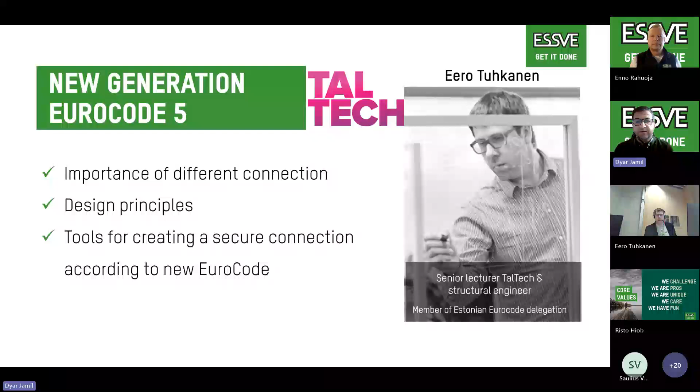For those who are new here, I'm Eero Tuhkanen from Tallinn University of Technology, and we have this nice academy together with ESSVE, where I present some small parts from the new coming Eurocode 5. We do that in a very short way, so one presentation is only 10 minutes, to not overwhelm you but to give some idea what is coming. Today's presentation is the follow-up of the previous one. It's about axially loaded fasteners. Last time we spoke about pull-out strength, but today's topic is design axial compressive resistance.

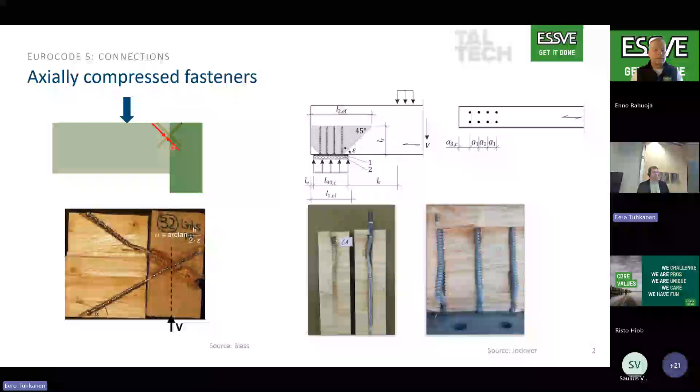Axially compressed fasteners or screws are mainly used in two situations. One is here on the left side, where the secondary beam is connected to the main beam, and if we do this well-known cross connection with the crossed screws, that means one screw is compressed in this situation. And here is one picture from the test series made by Professor Blass, where we can see this compressed screw buckled in the timber.

The second well-known usage of the screw is as a reinforcement, where, let's say, under the support we have not enough strength perpendicular to the grain, so we can reinforce the area to increase the support area, and here the screws are also compressed, and buckling is also possible in this situation. This buckling occurs in the area about 5 to 10 centimeters from the load application point, so very close to this connection area.

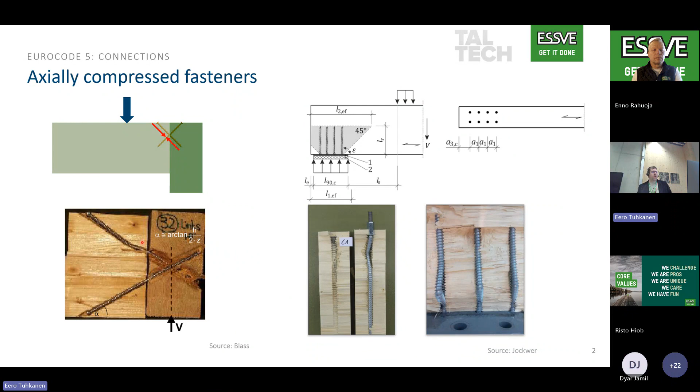This calculation method is already used in European technical approvals, so-called ETAs, but now it is also presented in Eurocode. In Eurocode, the model we have to check is that we have to find the minimum value from the timber part and from the steel part. The timber part, which we spoke about last time, is the characteristic withdrawal resistance. It's the same as when we pull out the screw. It doesn't matter if you push it in or pull it out. The calculation is the same as we saw last time. And of course, the design value is covered with the partial safety factor and the k modification factor.

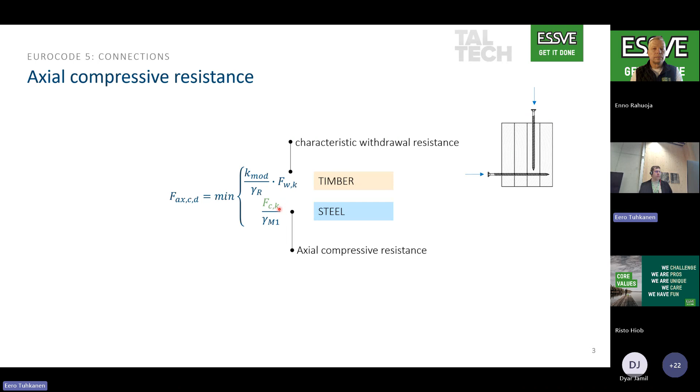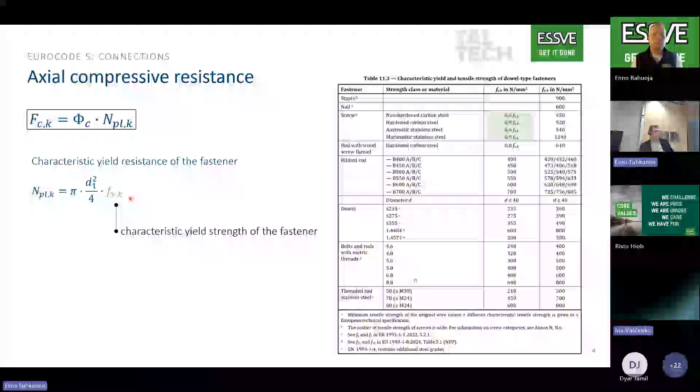But for compressed fasteners, we also have to check the steel part, which is the axial compressive resistance. The axial compressive resistance is covered with the partial safety factor for steel. Today's topic is this Fc,k, the characteristic value for compressive resistance. Compressive resistance is actually the characteristic yield resistance of the fastener, which depends on the geometry of the fastener and also the characteristic yield strength of the fastener. This is a material parameter, and in the new Eurocode you can find these material parameters in the table, so you don't have to go out to find that.

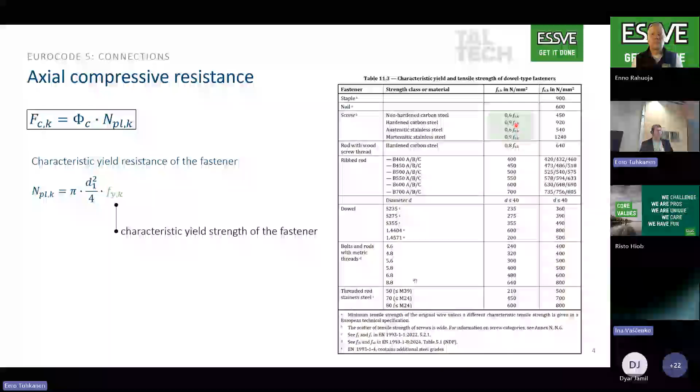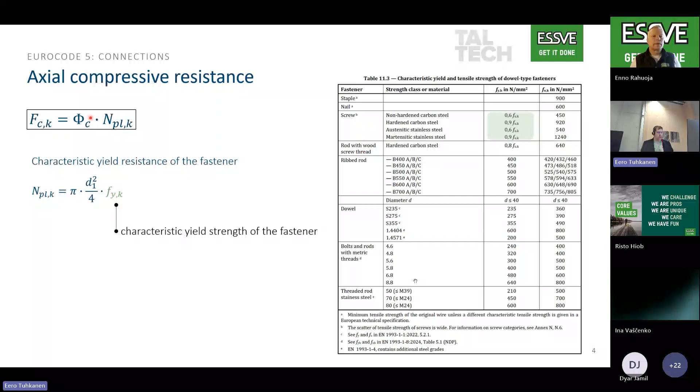But the only thing is that the buckling in this fastener or screw is not free. It means that it's supported by the timber around the screw, and this is considered with the characteristic foundation modulus of the fastener, CH, which depends on the characteristic density of the timber. So this buckling is prevented by timber, and then we have to check how much density we have to find this buckling factor.

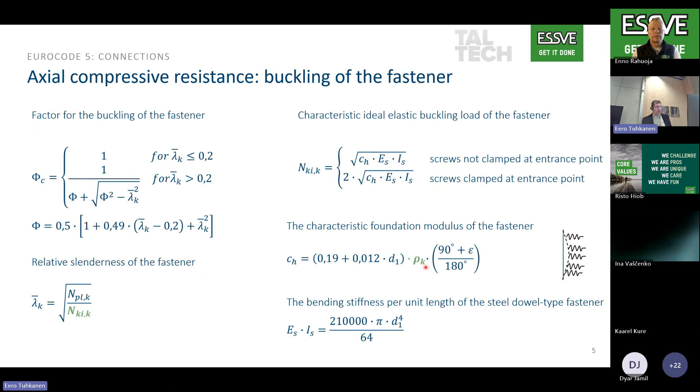The beneficial scenario for this: the pull-out resistance we talked about last time, and the compressive resistance, the topic today. One very good example where to use these screws is the so-called tapered beam, where we have a glulam beam with an inclined top part. In this kind of beam we usually have problems in the middle zone, where we have tensile forces perpendicular to the grain, and we can reinforce that with the screws.

So here we can calculate the pull-out strength of the screw. Also, usually the problematic thing is the embedment or the compression perpendicular to the grain in the support area, and here we can use the screws as a reinforcement for this area.

But coming back to last week's presentation, where we talked about the pull-out strength of the screw, or push-in strength of the screw, it was depending on the factor K mat, which is a material factor that considers the different layers in the structure. We can use the benefit in such structures: depending on the amount of layers the screw is penetrating, we can increase this value for pull-out strength or push-in strength. So this was the topic today.

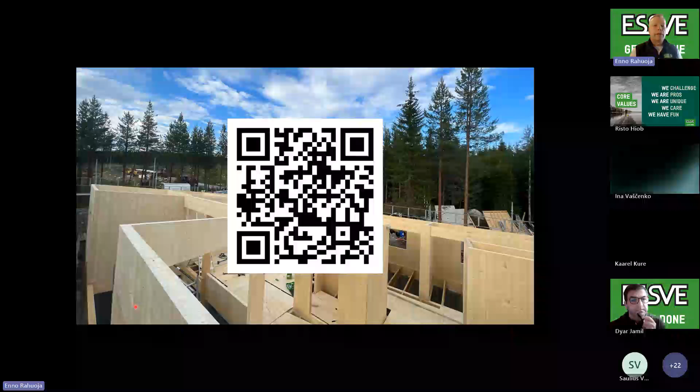My part today is to introduce ESSVE as the ESSVE timber calculation program. I'm a technical sales engineer in the ESSVE group team, and I have over 25 years of experience with fasteners in the Baltic states. Today we have two applications in our calculation model: one is axial, another one is lateral. Today's subject of our calculation is axial calculation.

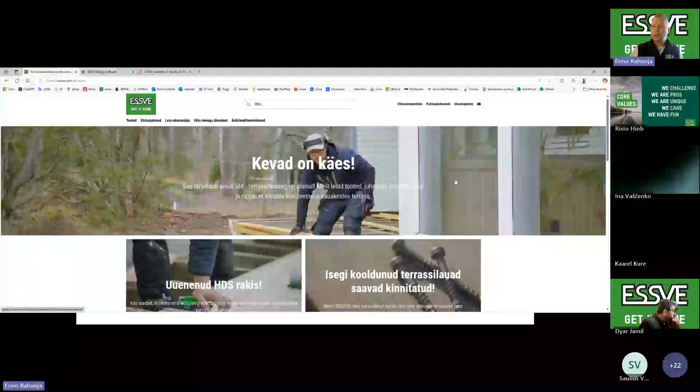If you go to our local country website, either Latvia, Lithuania or Estonia, you can easily switch the language here. The view is similar. If you go here under timber, today I show the Estonian site, you will find wood, and another one is concrete. Roll it down and you will find the ESSVE software. A little bit lower you will find the catalog for the timber tech product range. And here is the area where you can also register over our website and see the history of our presentations.

If you log in for the first time, I recommend you sign up with all your initials. Then those will stay on the footer of your calculation report, and in the future your contact info will be included when you deliver it to your customer, well presented on that report.

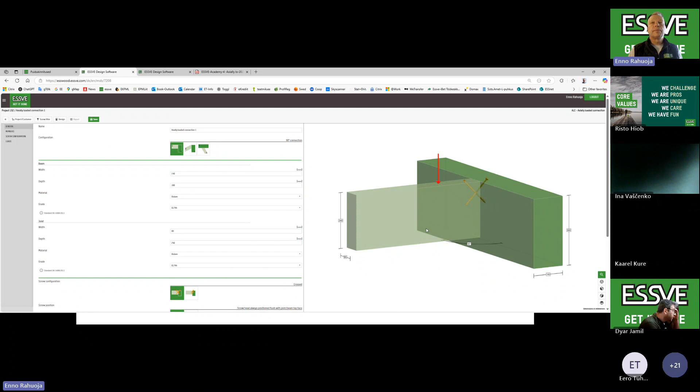Today, the focus was axial connection. So I take it from the right side, the application. And if I'm looking at the application side here, then today we're looking at a 90-degree connection. And let's say at the beginning I don't change any parameters, but you could change here the type of timber, and the type of timber also here in the subconstruction area.

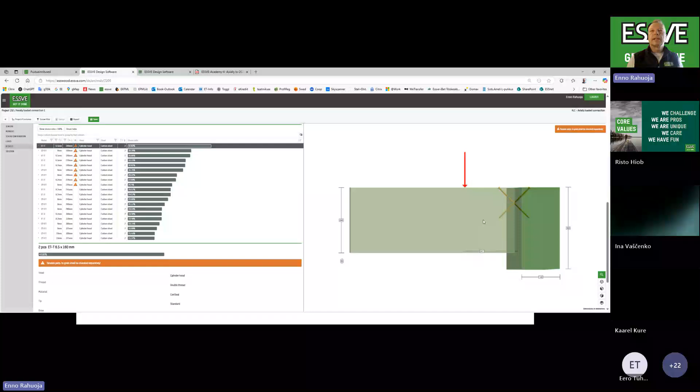But what I wanted to bring up here in the first stage is that when we go directly to the design, then often you will get the exclamation mark. And the exclamation mark will say that you need to check separately the tension perpendicular area, which means that the wood could split here. So it's a little bit connected to Eero's presentation today, what he showed, that for glulam you need to find out the strength of the different layers, so to get the timber strengthened.

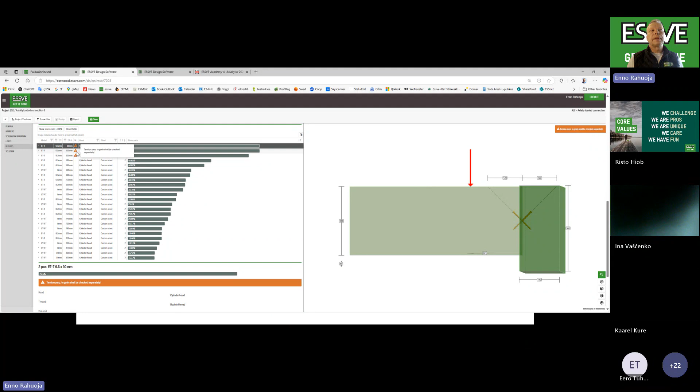The easiest way in this case to get rid of those exclamation marks is when we go back and we move the location of the connection. So we bring it a little bit lower. So when I now go into the design area, then we see that there are only 2-3 applications left with just short fasteners. When we go for a longer fastener, let's say here, then that will disappear.

And for example, when we look at this connection at the moment, then you could look also at the cross section, that 47% maybe is not satisfying me on security level. You could also use another option with the same length of fastener, where you're going to have double the amount of fasteners, because the width of the support beam is able to take 4 fasteners across the wood level.

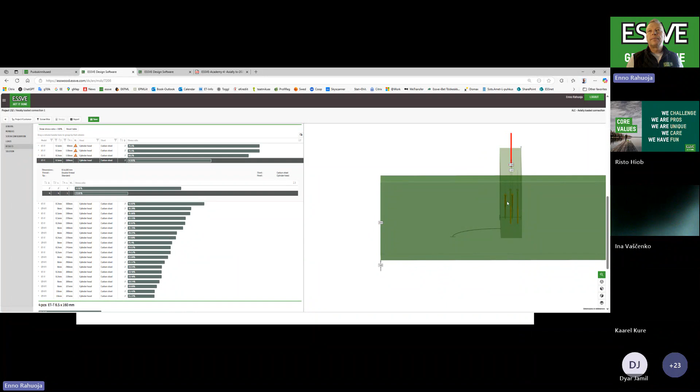Now, as today's subject is to talk about thin wood, which is very popular in our Eastern Europe region, this connection part here could be 45 millimeters. Then we go back and look here, where is the dimension area? And let's say the dimension area here, we will change it to 45. You see that turns red here. So we change it to 45. We can have maybe 250. And we'd like to have ordinary timber, so we can choose that as well. Let's say the timber is C24, not C16.

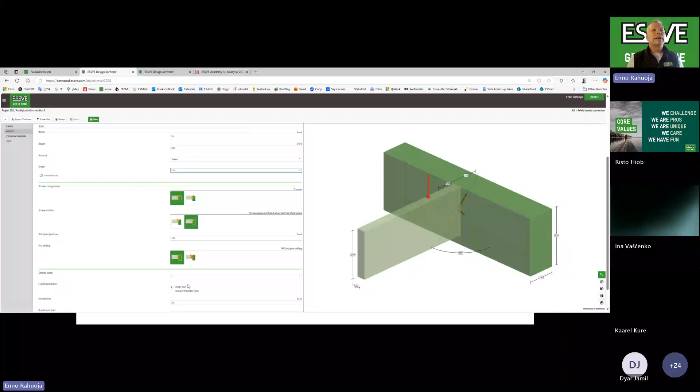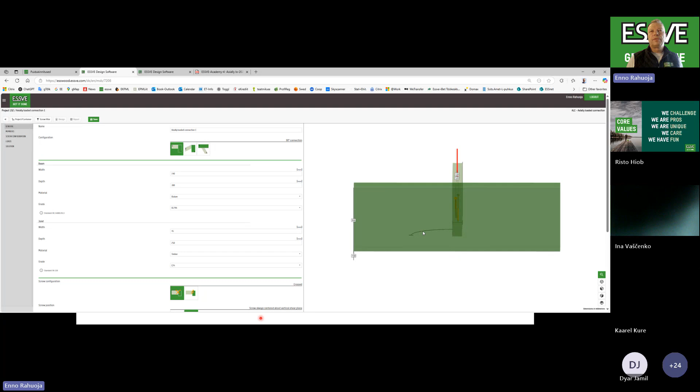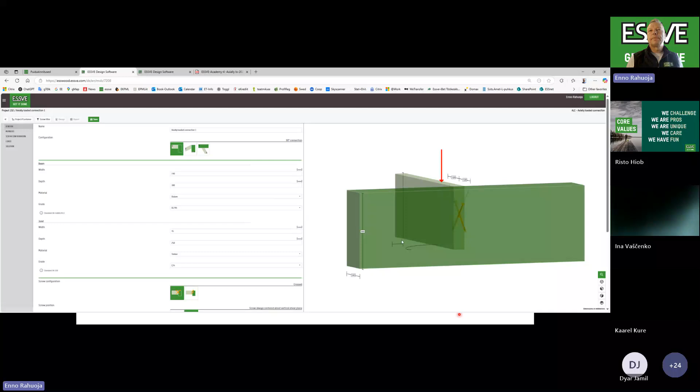And now when we go to the calculation, I don't change any other parameters at the moment, but I put it in design, and we find out that there are no solutions. So we are not able to do the calculation because the wood is so thin. As we know, there are some edge distances, so we are not able with such thin wood to make this cross connection. So in the first steps, I recommend changing either the lineup of the fasteners or making a pre-drilling. So you're able to test pre-drilling as well: does a pre-drilled hole give us better edge distances? But as we see, pre-drilling doesn't give us an opportunity to do that either.

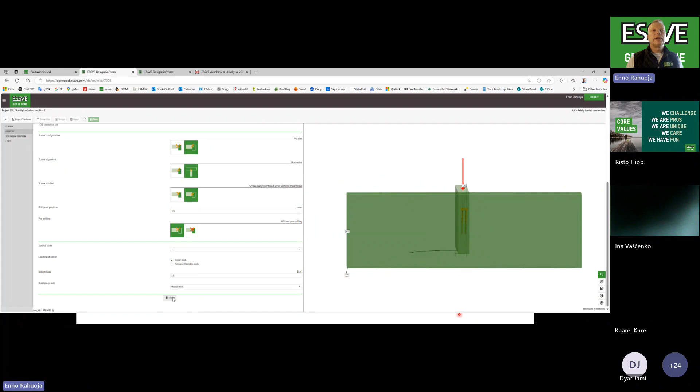So the only option we have here is, let's say, a vertical lineup of the fasteners. A horizontal lineup is also possible for thicker wood. As we see here, in the thin wood case there is no option at all. So the only option here is a vertical parallel fastening point. If they're going to be at the upper level, we're going to have a similar exclamation mark. But we could again move it a little bit lower.

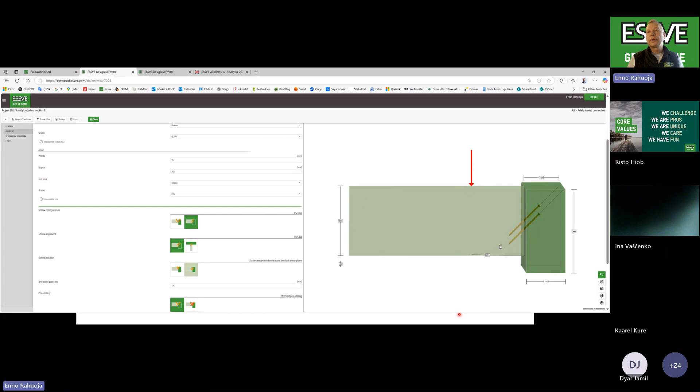And it shows that we need to install the fastener from up down, but actually we could also do it from down to up. So if we have a wall here, then we are able to fix the connection from the bottom up, just following the similar instruction where the fastener is coming. And let's say we also increase it here to a more difficult service class. We could also load higher design values. Let's say put here 4, not 24, but 4, and we'll see. Do we get some solution, or for that wood application is there not enough wood to go this way?

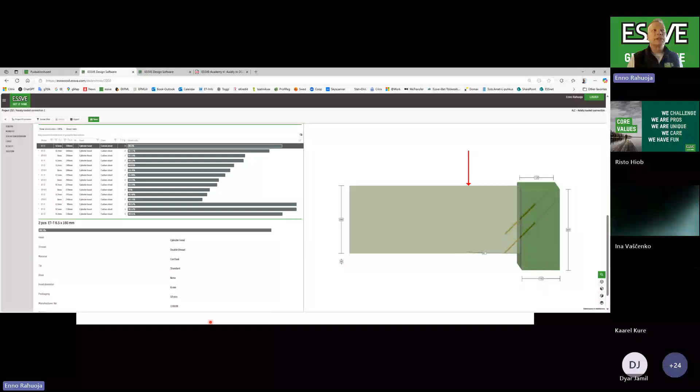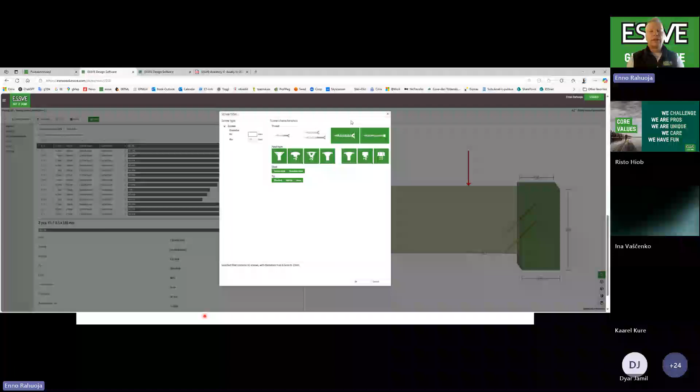At the moment, we didn't find any exclamation marks. We found that we have options for fastener diameter 6.5, 8, and 8.2. And if the engineer wants to sort the screws, you could click the additional window here and put that the minimum diameter I want to use is, for example, 8. Then you get the table sorted so that you have fewer fasteners to choose from.

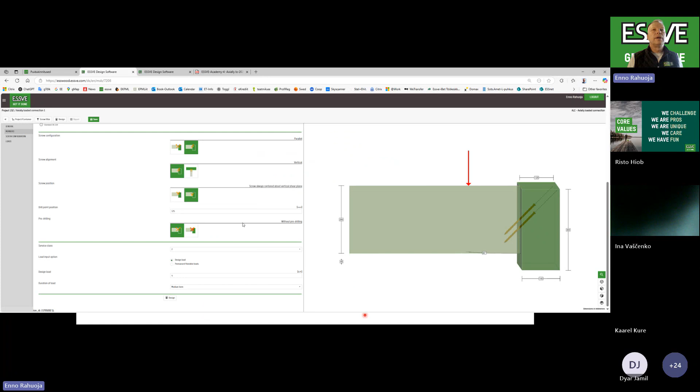Also, you can select it here. Do you want to have 1 or 4 fasteners? At the moment, I have to then switch back the screw level to, let's say, 0, so that it gives me a wider range. Then here we could bring, for example, the 6.5 fastener option, where there are also 3 fasteners in it. So it brings a third one also into range, and we could make the calculation.

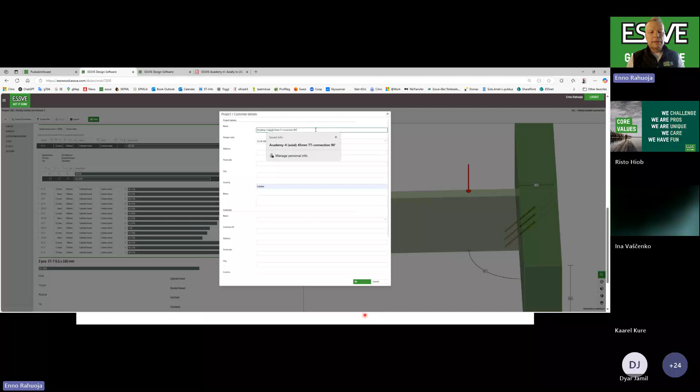So in the project area, we could fill in all our project names and info, and let's say we make a sample here, Academy 4, the day, and I put it here times 3 fasteners. And if we fill that up, then we can go to the report. And when we click the report area, you will get a nice document to look over.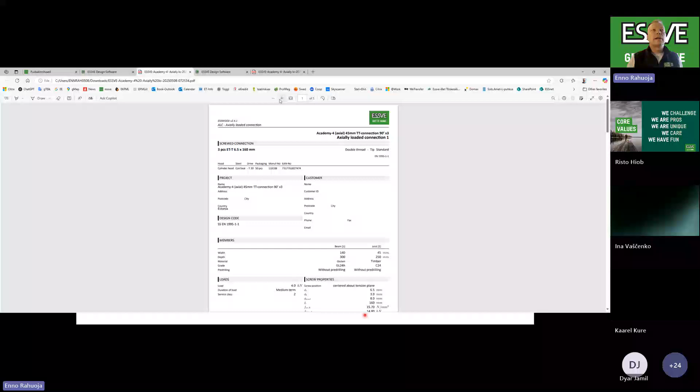That's the area where you could fill in all the project site details. I think I have filled in one project site here before as a sample. It comes like that. I will enlarge the picture a little bit for your better view. Then we see all the selected timbers for this application. We see also the loads: we selected service class 2 and put a load of 4 kilonewtons on it.

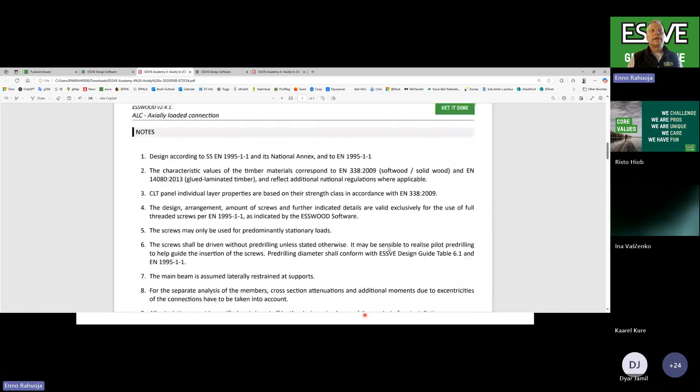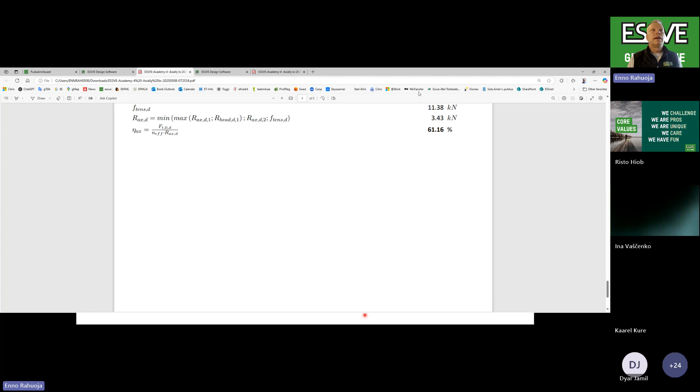Here are the documents for that area, and that's the document we can deliver for the installation guys. All parameters nicely in, distances well described, and here you can also double check all the project calculation details. So this is the result of the day's presentation. If you have more questions, you are welcome to come back to me. I will move that one down at the moment.

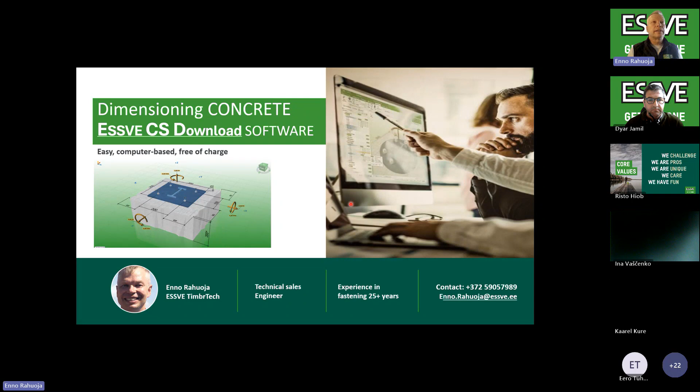Before we go to the questions, I will also raise the poll and ask you a question about the ESSVE calculation program. Please choose the two most common options you're going to use in daily business, and that helps us develop our calculation program further. At the moment, we have lateral and axial application, but in the future we're looking forward to notch and reinforcement. So you can make your choices here and give us the feedback.

At the moment, I see that 7 responses have arrived, and the biggest selection is either reinforcement or notch. It's changing, and lateral also comes, but equally you use all of those, at least from the current view. And I give the word to Dyar now.

Thank you, Eero, for your great presentation. We'll see if somebody has questions. But I have one question for Eero. You talked about how we can screw from above or from below, depending on the situation. Is there a difference in the capacity of the screw if we screw from the upside or the opposite side, from the downside? Is the question for me or for Eero? Yeah, it's a question for Eero.

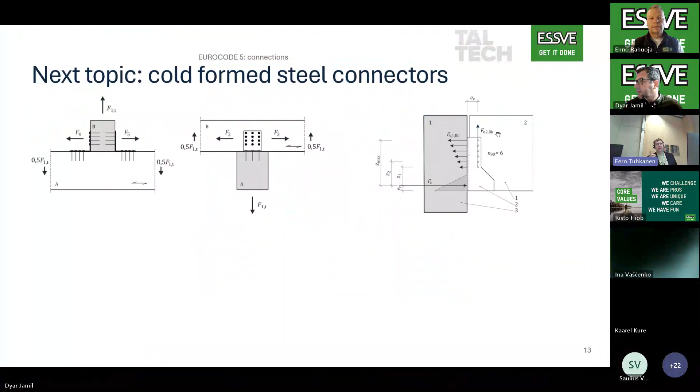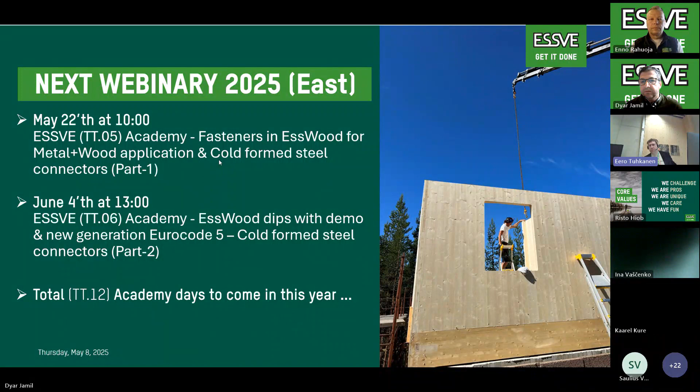Okay. Yeah, it depends on the situation. If you change the direction, it might be that the screw is either compressed or pulled. So when it's under tension, it doesn't matter. But when it changes the force acting in the screw to compression, then it might be that buckling is decisive and the capacity is a little bit smaller.

But we don't talk about cross screws. We talk more about parallel screws when we screw from below. Oh, no. Then in that case, it is not different. It's all the same. It depends on the length of the thread in the second or hidden member. Okay. Thank you.

I don't know if we have other questions. The time is running out, 9:30. Do you have more questions? I have raised one question which repeats a little bit an earlier presentation. How to ensure a secure connection in a joint where the fixing screw works in pull-out? I put it in the chat field.

Yeah, in the pull-out case, we can always design the connection so that the pull-out itself is not decisive. So the decisive part is steel strength, and when the steel is involved, we can ensure some amount of ductility in the connection. So the designer can regulate that with the length of the screw. Thank you, Eero.